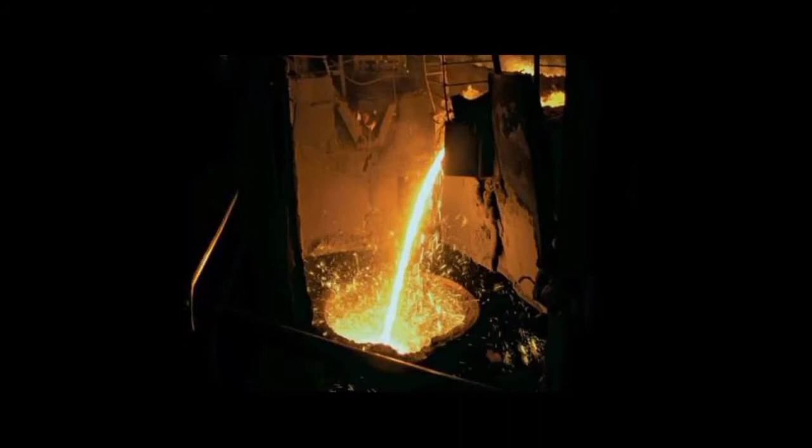So, in your opinion, what is casting and welding technology? Here is the definition of casting. Casting means molten metal that forms or transforms into solid metal. Here is the process of casting: the production method that waits for it to cool and solidify to obtain the blank or parts is usually called metal liquid forming or casting.

Did you know that modern casting is divided or subdivided into two types, the expendable and non-expendable?

The advantage of casting, from internal to external parts, is that you can replicate even difficult forms, sizes, or shapes of a material.

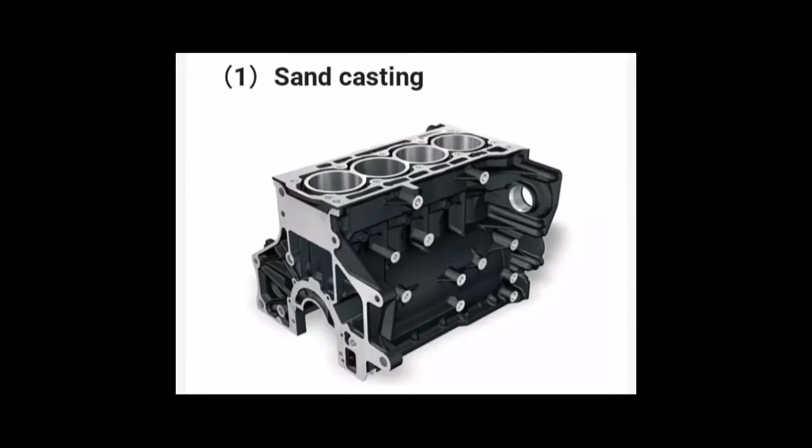Here are the 10 types of casting. Number one is sand casting. What is sand casting? A casting method for producing castings in a sand mold, used for steel, iron, and most non-ferrous alloys. Castings can be obtained by sand casting.

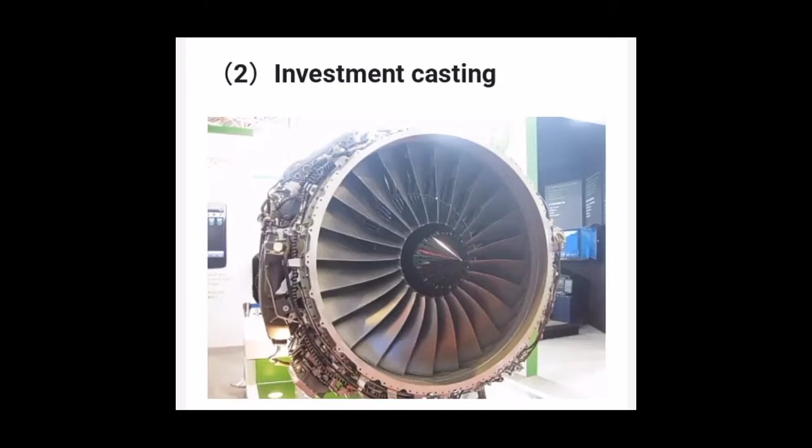Number two, investment casting. What is investment casting? A kind of casting method that usually refers to making patterns in fusible materials, covering the surface of the pattern with several layers of refractory materials, and then melting the patterns out of the mold shell to obtain a mold without a parting surface, which can be filled after baking at high temperature.

Number 3 is die casting. The high-pressure metal liquid is pressed into a precision metal mold cavity at high speed, and the metal liquid is cooled and solidified under pressure to form a casting.

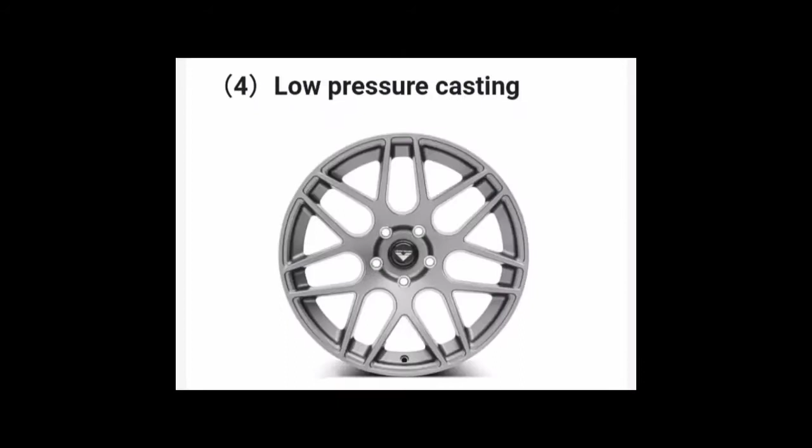Number 4, low-pressure casting, refers to the method of making liquid metal fill a mold under low pressure, 0.02 to 0.06 MPa, crystallized in the form of casting.

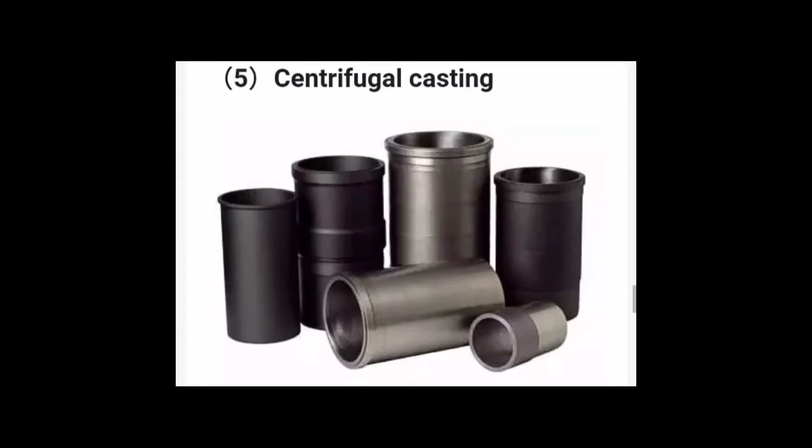Number 5, centrifugal casting. It refers to a casting method in which molten metal is poured into a rotating mold, and the mold is filled and solidified under the action of centrifugal force.

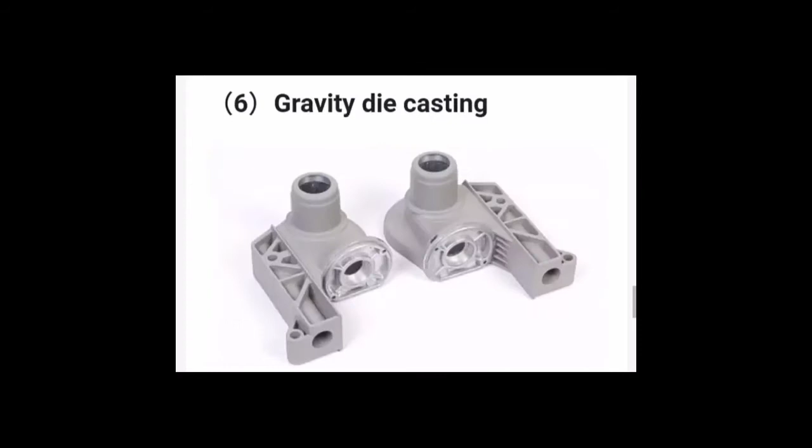Number 6, gravity die casting. It refers to a molding method in which liquid metal fills a metal mold under the action of gravity, and cools and solidifies in the mold to obtain a casting.

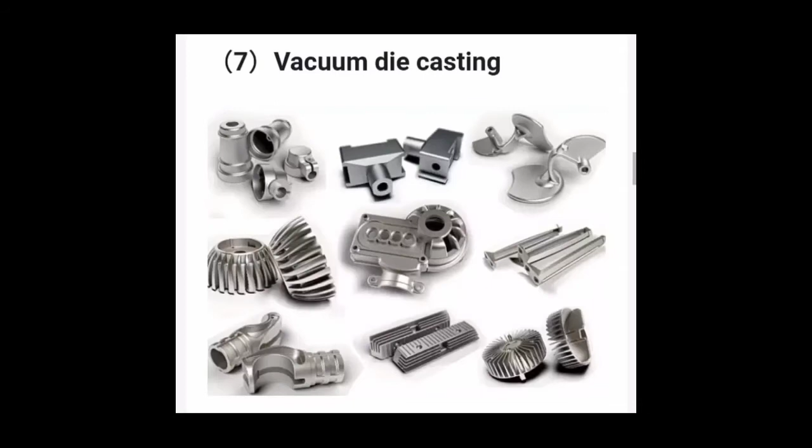Number 7, vacuum die casting. An advanced die casting process that improves the mechanical properties and surface quality of die casting parts by significantly reducing the pores and dissolved gases in the part, by extracting the gas in the die casting mold during the die casting process.

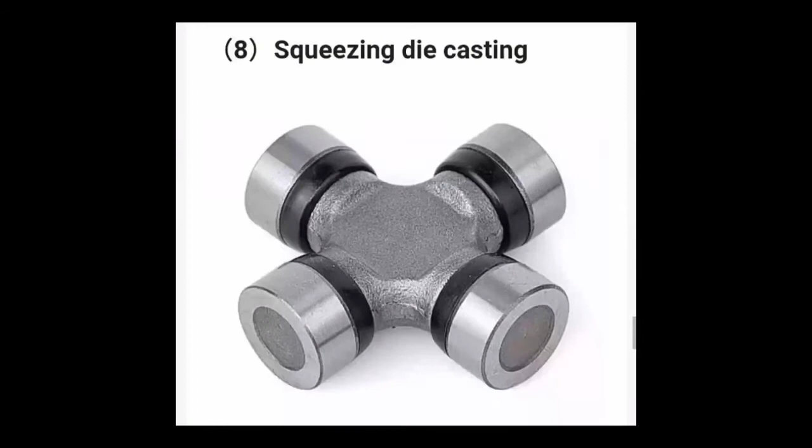Number 8, squeeze die casting. It is a method for solidifying liquid or semi-solid metal under high pressure and flow forming to directly obtain the product or blank. It has the advantages of high utilization rate of liquid metal, simplified process, and stable quality. It is an energy-saving metal forming technology with potential application prospects.

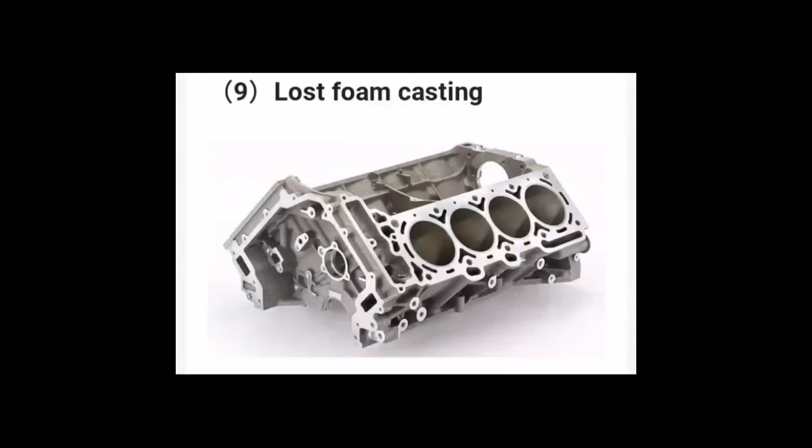Number 9, lost foam casting, also known as solid casting. It is a new casting method that uses a combination of paraffin or foam models similar to the size and shape of the casting to form a model cluster.

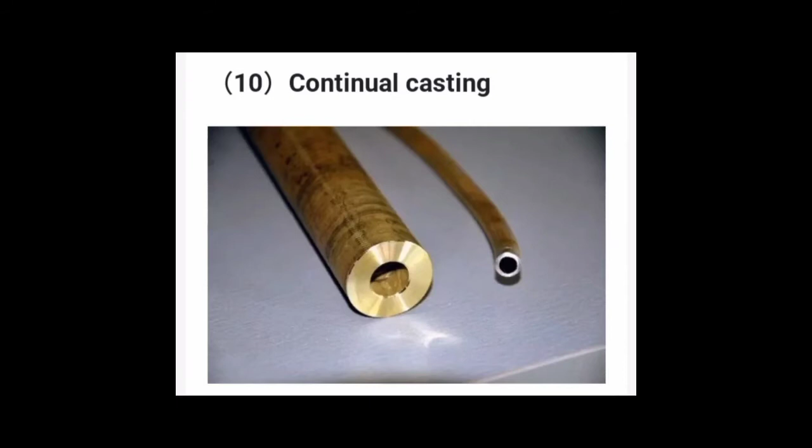Last, number 10, continual casting. It is an advanced casting method. Its principle is to continuously pour molten metal into a special metal mold called a crystallizer.

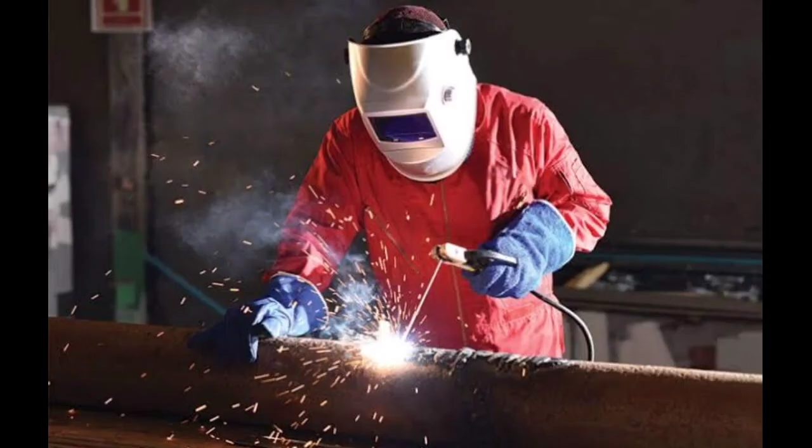Welding ay isang paraan ng pagdidikit ng dalawang piraso ng mga metal sa pamamagitan ng init. Kasama sa produkto ng welding ay ang mga eroplano, makina, tubo, tulay, kagamitan sa bahay, o anumang ginagamitan ng metal.

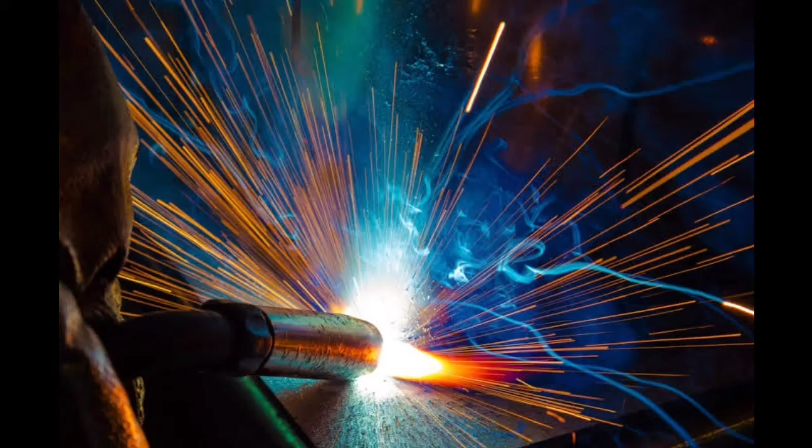Welding has been around in some form or fashion since the 4th century AD, and modern welding technology fueled the Industrial Revolution and is crucial to many modern industries.

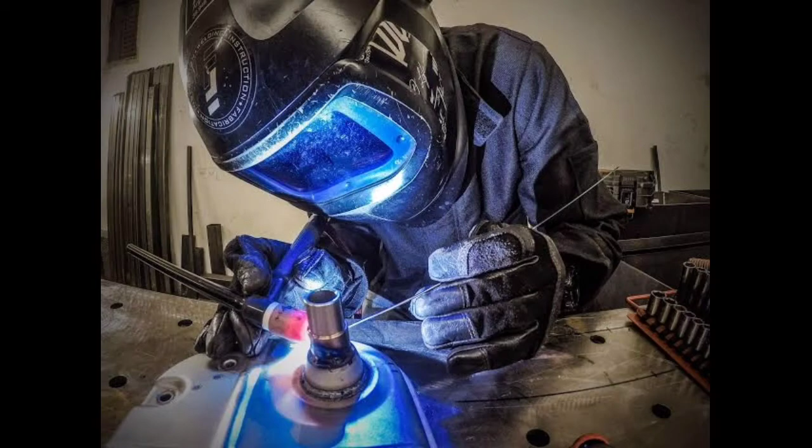Welding is a very broad term covering hundreds, if not thousands, of specific material joining processes, even if you're not a welder by trade or a material joining engineer.

Main welding processes are shielded metal arc welding, gas tungsten arc welding, gas metal arc welding, flux core arc welding, submerged arc welding, electro slag welding, and resistance welding.

These are only the basic welding methods, and there are many different variants of each, along with techniques that weld using friction, laser, and even electron beams. Each process is specially designed for different metals, and there are even processes that can weld dissimilar metals.

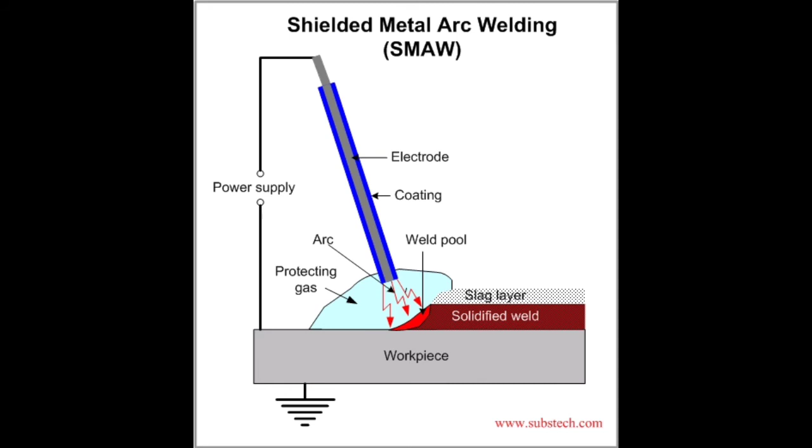Welding processes induce fusion through some energy source. In other words, the base metal is melted in the same way as a process like shielded metal arc welding, which uses an electrode that melts to induce fusion on the base metal and acts as a filler metal for the joint.

Gas tungsten arc welding, or what you might know as TIG welding, uses a tungsten electrode and an inert gas, usually argon, to weld the base metal in a common blend.

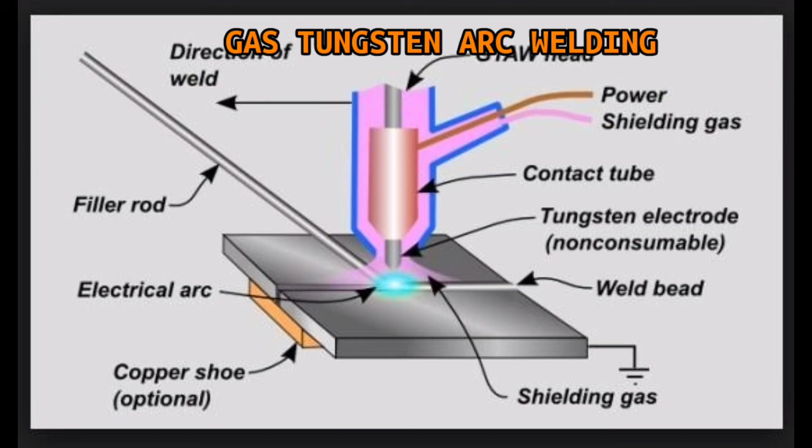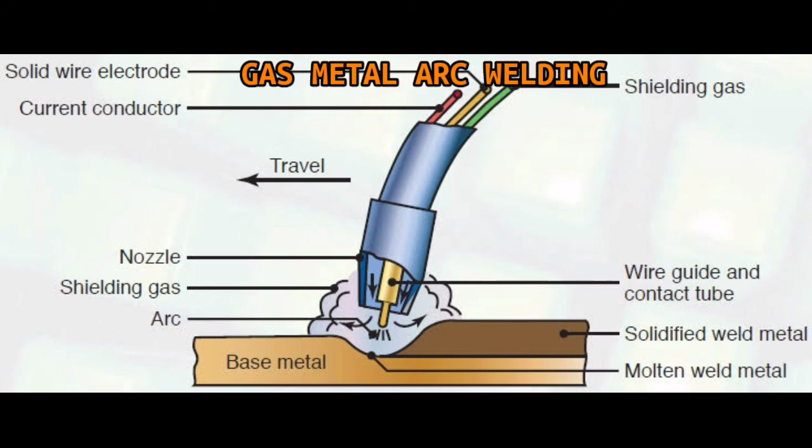Gas welding and energy beam welding: this process uses gas or an energy beam to heat up the material rather than current and voltage. The gas and energy method variants are fairly simple to understand in its basic mechanics.

Flux core arc welding is a semi-automatic or automatic arc welding process. It requires a continuously fed consumable tubular electrode containing a flux, and a constant voltage, or less commonly a constant current, welding power supply.

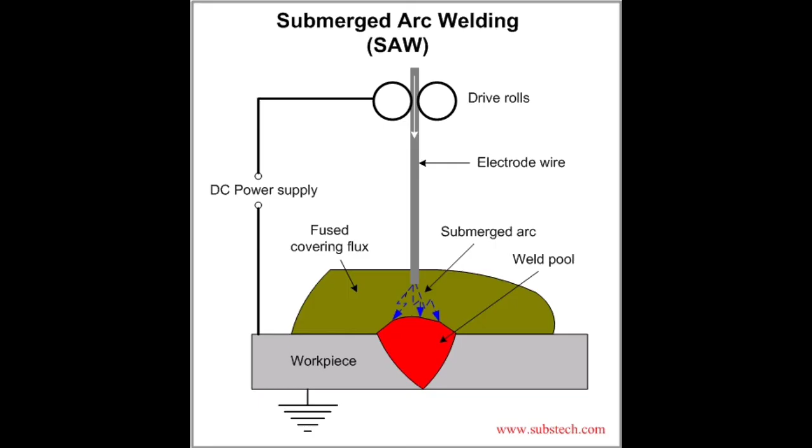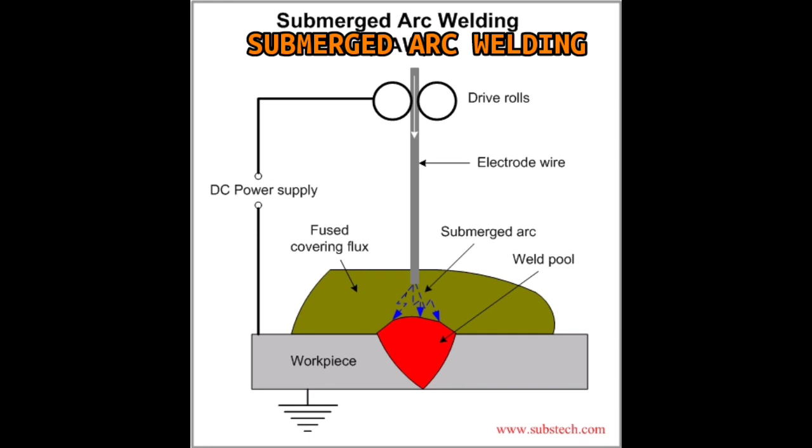Submerged arc welding isn't actually an underwater process. It uses a consumable electrode to weld under a blanket of flux, therefore submerging the weld under the flux to keep it safe from the atmosphere.